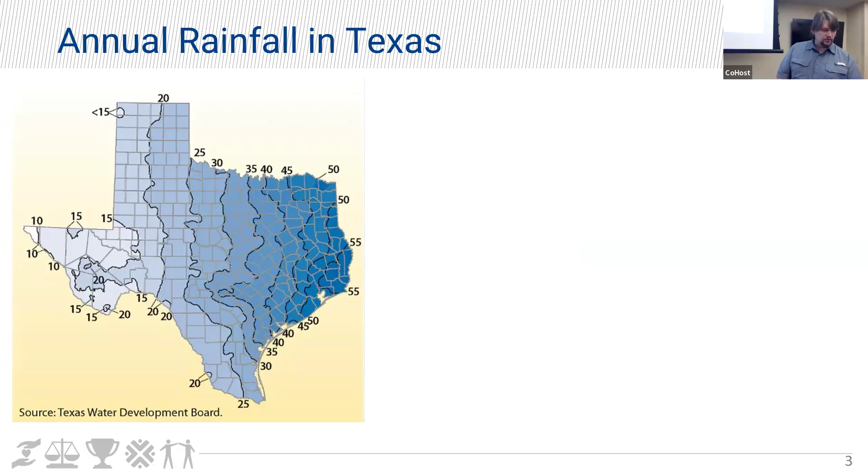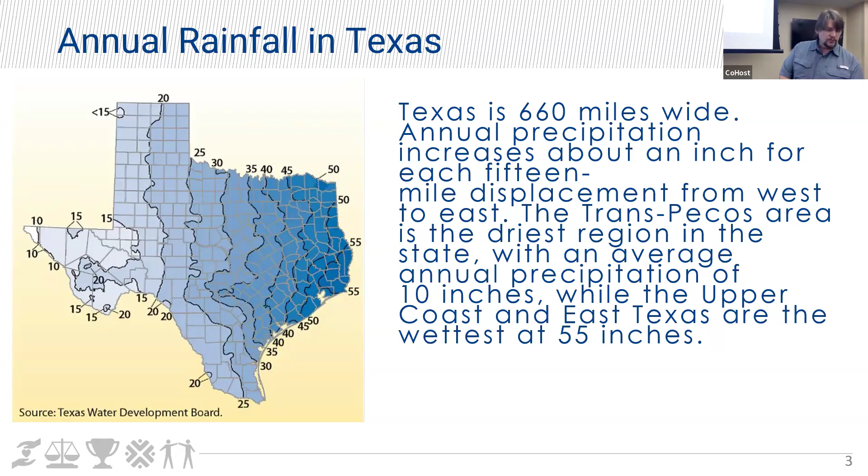Before we get into that, I want to get into the annual rainfall in Texas. Here's a map. If you see way out in West Texas, El Paso area, they only get about 10 inches of rain every year. And as you move east towards the Beaumont and the Piney Woods area, for every 15 miles, you gain an inch of water. That is important because the area that we live in is very densely populated. And we have to pump water back uphill, back west from the east where it's more abundant to where it's more populated.

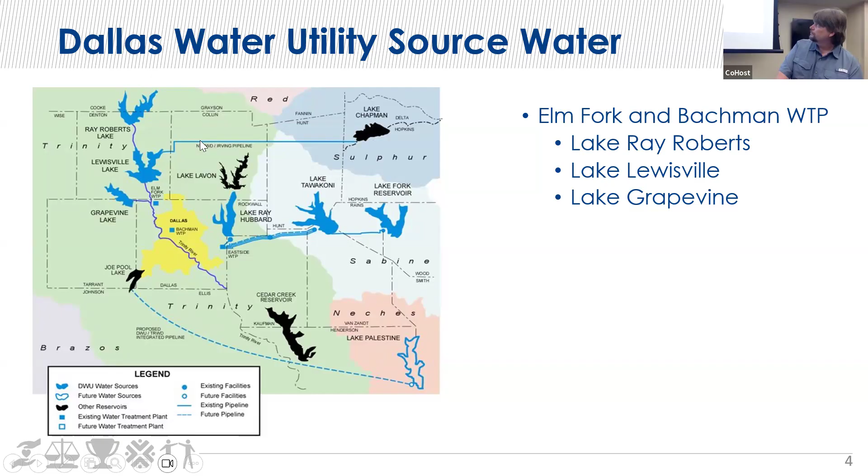However, because we have pipelines from Lake Chapman that pump all the way over to Lake Lewisville, in a roundabout way, we can get some of that water, or that water affects us. The same with Lake Lavon right here. We don't have water rights to that, but it will flow downhill into Lake Ray Hubbard. But this branch of the Trinity River will affect the Elm Fork plant and the Bachman Water Treatment Plant. And down here, on this side, where we have the East Side Water Treatment Plant, these three lakes supply that with water.

Okay. And Lake Ray Hubbard is the only lake that Dallas has 100% of water rights to. We're the only ones that can pull water from that lake. You can see here, water is being pumped from Lake Fork to Tawakoni, and from Tawakoni west into the East Side Water Treatment Plant. And down here, just realized you cannot see my mouse.

Down here, we have Lake Palestine. Dallas does have access and water rights to Lake Palestine, but we can't access it yet. They're in the process of building the IPL, the integrated pipeline, that will move water from Lake Palestine back up to Joe Pool. And from there, the next few years, Dallas will be accessing that water. And whether it goes from Joe Pool up to the Bachman Water Treatment Plant, or whether they build a whole other plant, remains to be seen.

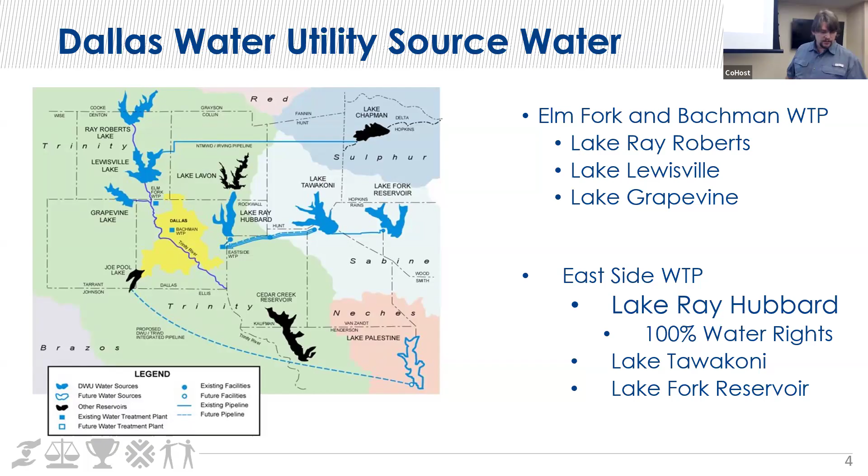Okay, anybody recognize this? Dallas Cowboy Stadium. It has an interior volume of 104 million cubic feet and can hold approximately 778 million gallons of water if it was totally full. So at maximum capacity between the three plants, we produce 900 million gallons a day. And that's enough water to fill Cowboy Stadium up in 20 hours and 45 minutes, or 422 times per year at full throttle. That also equates to 328.5 billion gallons of water in 1 year.

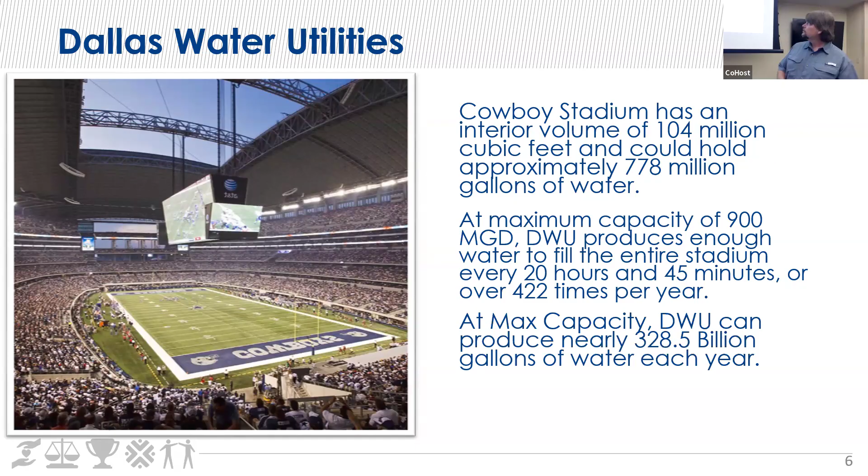So I'm going to go into the plants and break it down a little bit. The Bachman Water Treatment Plant, where I work, is the oldest treatment plant. It was constructed in 1929. It's still in service today. There have been other plants in the past, but they were too small and outdated, and they did away with them. We've had multiple expansions in the 30s, right after it was built, 40s, and 2001. Currently, we can do 150 million gallons per day.

We have had multiple treatment upgrades throughout the years to comply with ever-changing drinking water regulations. So as technologies improve, our regulations get tighter. We have to come up with new processes, whatnot, to treat the water. Currently at Bachman, we have 54 employees at that plant. Now we'll go into that here in just a few minutes.

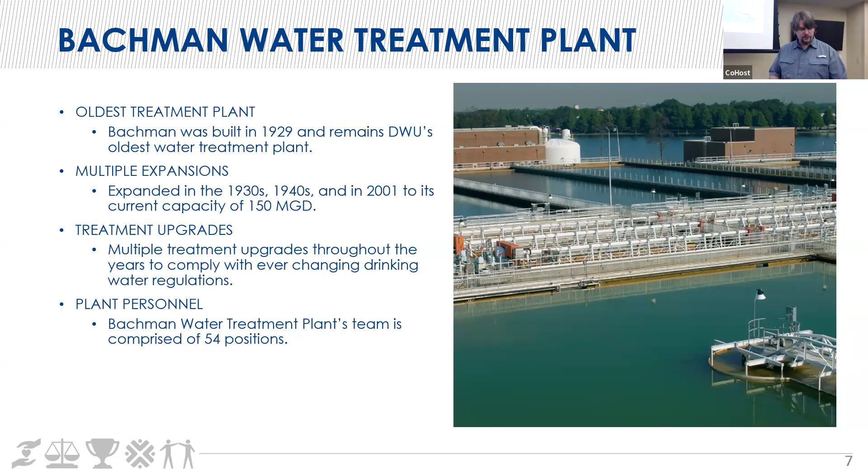Elm Fork. That's the one that's way up north in Carrollton. It's the second oldest treatment plant, and it was built in 1952. So remember that date, 1952. They've had multiple expansions over the years, 60s, 80s, and 90s. They've also kept up with the upgrades, and they have 50 positions at that plant.

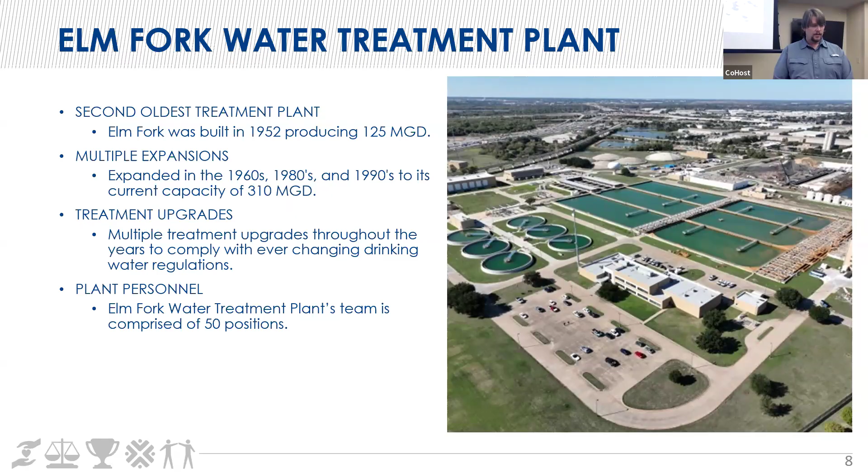10 years later, East Side plant was built, 1962, and that's still our largest water treatment plant. They've had multiple expansions over the years also. They also have maintained treatment upgrades to comply with the new technologies and regulations, and they have 71 positions at that plant.

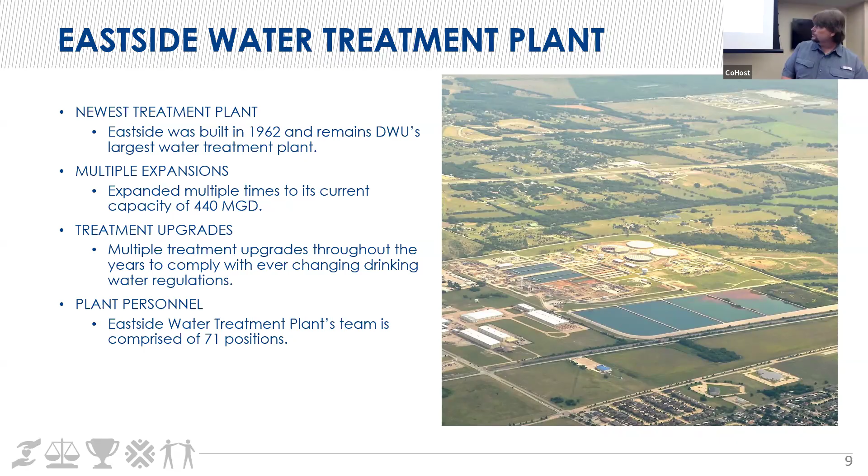Okay, so Bachman being the oldest, right here, built in 1929. We're coming up on our 100th year pretty soon, next few years. It sits on about 30 acres. We can no longer expand that plant and haven't been able to expand that plant for quite some time because the city grew up around us. The same with Elm Fork. The city has pretty much grown up around the Elm Fork plant. They have a little bit of room up there for expansion, but not very much.

So Bachman sits on about 30 acres. East Side, way out in Sunnyvale, sits on about 250 acres. So they have plenty of room to expand. And it's a good idea that they built that plant way out there because whenever Dallas does expand or can expand, it can only move out eastward, which is helpful because we already have a plant out there that can handle that much growth. Okay, let's see.

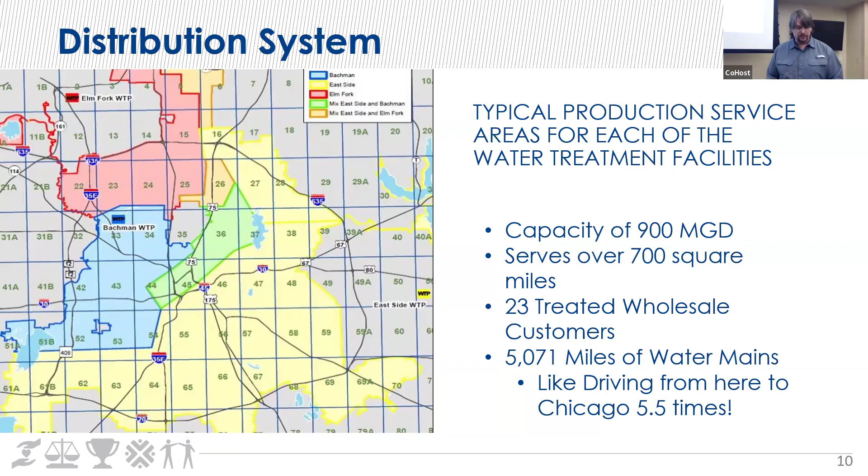This distribution system area serves over 700 square miles. We not only supply water to Dallas, but also 23 customer cities and large customers. There's almost 5,100 miles of water mains in this city. And that's like driving from Dallas to Chicago 5.5 times. That's quite a bit. And that's just the water mains. That's not sewer mains. That's just water. Let's get into the distribution system that we're talking about.

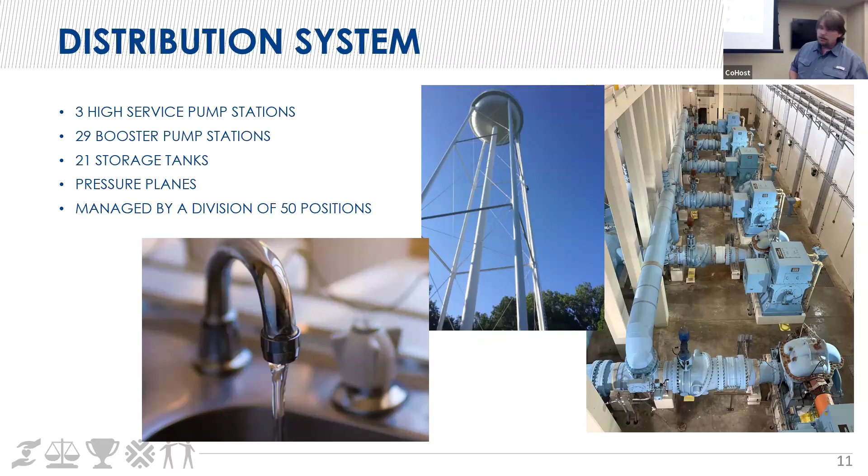So pressure planes. Basically, a pressure plane is based on elevation throughout the city. About every 130 feet of elevation starts another pressure plane. And right about, let's see, we'll talk about right here. Whenever the water comes into the system at its lowest point, there will be a booster pump station that will pump it uphill into a ground storage reservoir or an elevated water tank at the highest point of the pressure plane. That maintains pressure in the system in that little geographical area and a good supply.

So at the top of the hill, your pressure is going to be lower because the water is only going to be about however many feet that tank will hold. As you get down to the lowest part of the pressure plane, the water pressure will be higher. You may also have to have at certain points pressure reducing valves so that you don't have too high of a pressure, which may cause pipe breaks, things of that nature. It's based on efficiency, longevity.

So try to imagine the city of Dallas as bowl shaped, with downtown being at the bottom of the bowl. So whenever you take water from the bottom of the bowl and pump it uphill, about every 130 feet that you gain begins a new pressure plane. And you will not only have storage tanks, but outside of the storage tank, you will have isolation valves that will separate the water from the next pressure plane from running back downhill and increasing the pressure. That way we maintain about 40 to 100 PSI in each pressure plane.

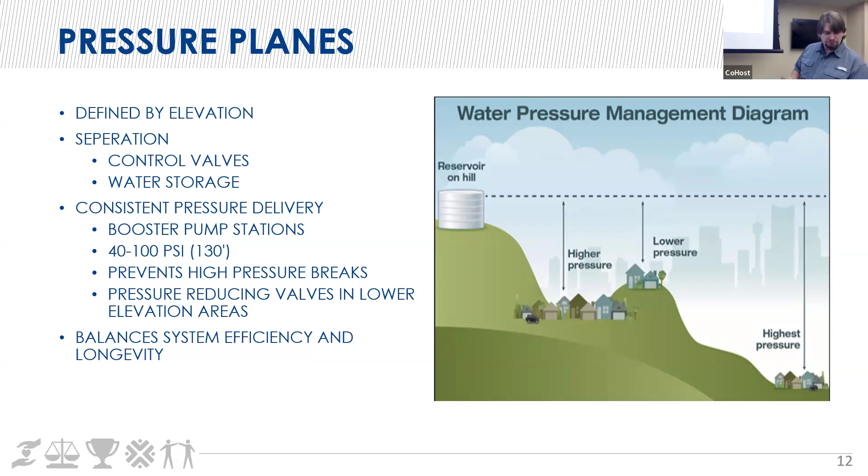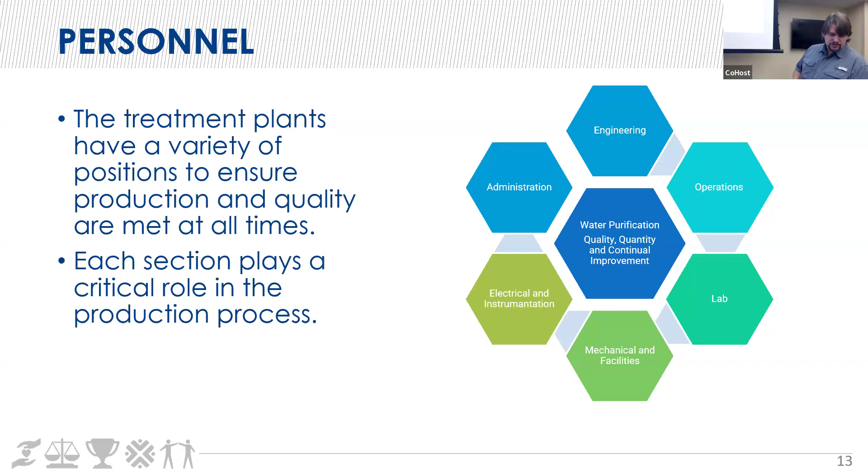Okay. So at the water treatment plants, we have a variety of positions that help make water treatment happen. We have operators, lab personnel, mechanics, electricians, administrators, that sort of thing. Under the operations umbrella, we have operators. Their job is to monitor water quality, conducting tests, operating all the chemical systems, utilizing the SCADA system, which is computers which allow us to control all of the various processes from a central location.

Our operators are also hazmat certified, so they can go in confined spaces. They also do process control, which is applying the chemicals, ensuring that the chemicals that they're applying are done in a way that is efficient. They're not wasting a bunch, wasting money, overfeeding, that sort of thing. And there's no experience necessary to become an operator. As long as you have your GED or high school diploma, you come in, and all the training we do is in-house. We will teach you water quality, and you can go to TCEQ online and take a test and get certified. And there are many different levels for that.

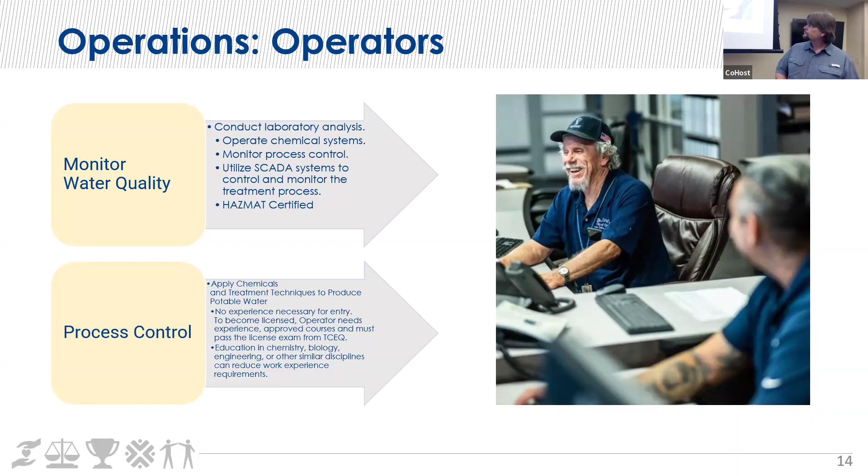Also under the operations umbrella, we have our laboratory chemists, and they also do process control and monitor water quality. And they work as a system of checks and balances with the operators. They perform some of the same tests, and they inform the operators if there's a discrepancy or there's an issue with the water that they need to make changes with. They work during the day. At night, it's just the operations staff at the plant, so they will perform the big tests themselves.

Not only do the chemists perform the same water quality tests that the operators perform, but they also take care of things like testing for manganese and dissolved oxygen, TOCs. They even go out to the lake where we have our pre-sedimentation lake at Bachman and check for zebra mussels and that sort of thing.

So one of the other umbrellas that we have at the plant is the maintenance department. So anything that is mechanical in nature, pumps, feed equipment, that sort of thing, the mechanics take care of. And they are also hazmat certified to go in confined spaces and whatnot.

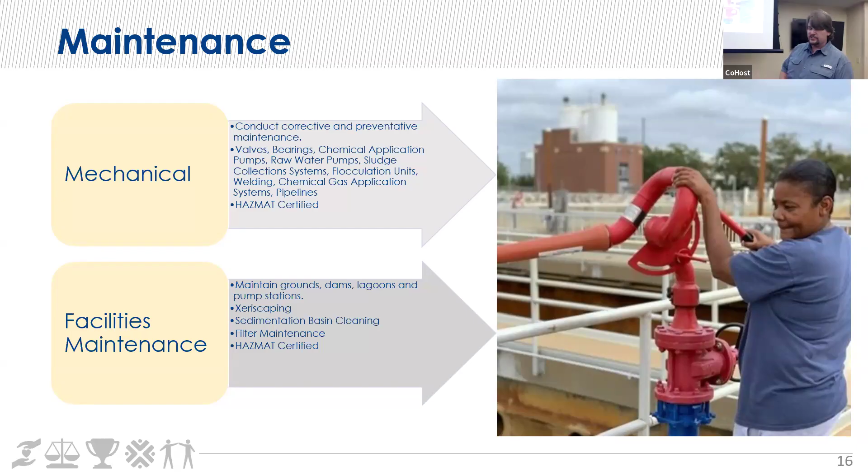Also under the maintenance umbrella, we have electricians. We have journeyman electricians, we have master electricians. And as soon as power is brought to the plant, it is the electricians that we have that move it to wherever we need it. All the buildings, all the pumps, feed equipment, everything. They maintain all of that.

We also have an instrumentation team, tech team, and SCADA programmers. Their job is to monitor online meters, calibrate them, make sure all of our feed equipment is flow pacing or performing as it should. And the SCADA programmer, he brings all of the processes into a central location for their operators to run the plant. SCADA stands for supervisory control and data acquisition.

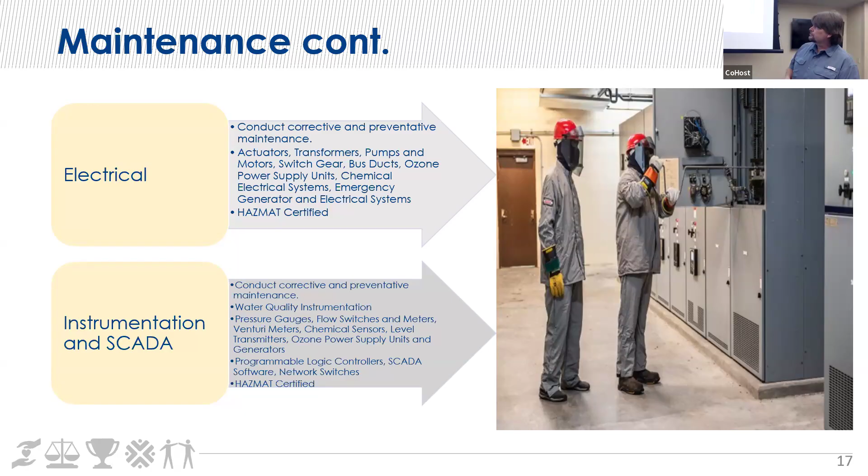So there's two parts. Yes, there's supervisory control so that operators can operate their plant equipment from one location or locally. But it also serves as data acquisition. So it's like a historian feature. So any kind of feed equipment, filters, you name it at the plant, we can pull trends and build spreadsheets and whatnot off of that. And both of these teams are also hazmat certified.

Another branch that we have at the plants is our engineers. And their job is to develop projects, improve processes at the plant, do research, conduct tests, or gather samples and send them off to a certified lab for testing, improving efficiency, keeping up with changes in technology. They also work as a liaison with contractors and vendors and outside labs, inspectors. They are very busy and very important.

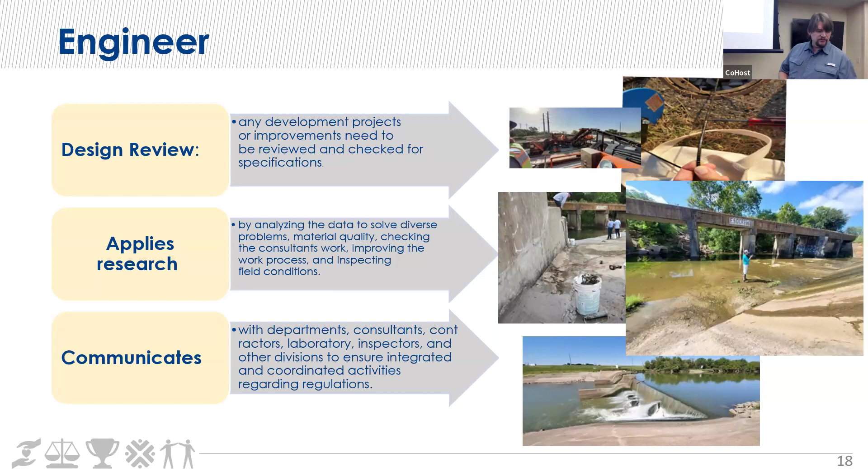Another position that we have at the plant is our environmental coordinators. And their job is to not only conduct safety and training and make sure that everything we do is safe, but also taking care of any first aid equipment, inspecting things like fire hydrants, eye washes, AED defibrillators, first aid kit components throughout the plant, our SCBAs. Those are the air tanks and the masks that we need when we go in certain confined spaces when we're doing maintenance in those areas.

She takes care of all that, keeps up with all the forms, makes sure that we are in compliance with the areas we need to be in. She is also our environmental coordinator, and she takes care of making sure that everything we do is environmentally safe. We're not having any chemical spills or anything that would impact the environment. They're very knowledgeable of the federal and state regulations and constantly doing training on not only safety, but also environmental things.

Okay, now we're going to get into the water treatment train aspect. So what happens to the water when we get it at the plant? So we get our water from the area lakes and rivers. All three plants in Dallas are surface water treatment plants. That means it's lakes and rivers and not groundwater. So when water first comes to the plant, we call that raw water because it hasn't been touched yet.

The first thing that happens is it goes into ozone contactors for disinfection. And if you can see right here, as water comes into the contactor, it has to go up and down these baffles. And that's where we inject our ozone. And we have to create ozone at the plant using liquid oxygen, which will turn into gas oxygen, and run it through a generator, which will zap it with electricity and create ozone. Ozone is very efficient at killing bacteria and little microbes in the water, but it doesn't last very long.

So when we inject it here in these first two cells, and we can inject it all across, but these first two cells actually show it. When we inject it into the water, it goes through diffuser stones, which create tiny bubbles. And as the water is coming down the baffles, it's running into all these bubbles to where it's agitated and has the most contact with the ozone. But by the time the water makes it across the contactor, there's very little, if any, ozone residual left.

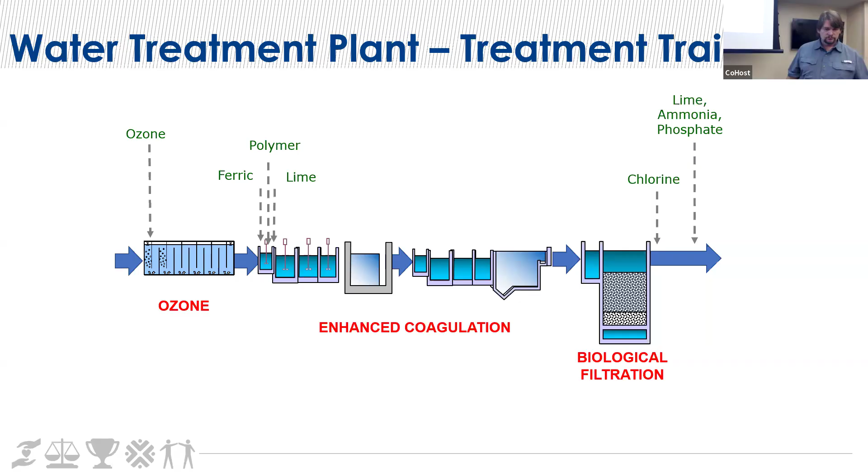Chlorine by itself is very strong, but just like ozone, it doesn't last as long. But if we add ammonia to the chlorine, it creates a chloramine, and it has a lot longer lasting power. I'm going to get into some compliance.

Okay. DWU adheres to ISO, which is a non-governmental international organization. And basically, it's like a universal system across several countries. That way, the language is the same, the numbers are the same, quality is the same. It's a framework kind of thing.

Not only do we adhere to water quality, we also adhere to environmental regulations, and we're actually certified environmental. And we also adhere to ISO health and safety. That improves safety, efficiency, environmental performance, things like that on a global scale.

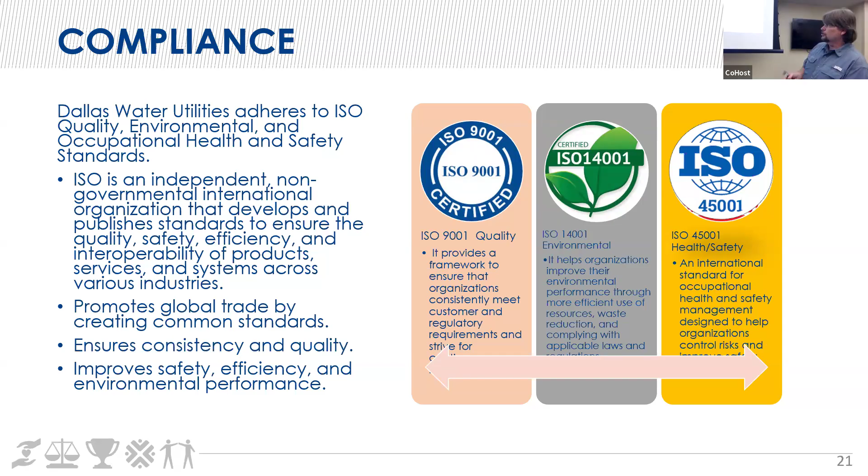Okay. Another part of compliance that we do is drinking water rules and regulations. So part of that is the EPA, which is the national level. They hand down certain standards and regulations through the Safe Drinking Water Act and the Clean Water Act and things that affect the water on a national level. But from there, it goes to the states. And TCEQ uses that and creates their own rules and regs and makes it a little bit more stringent.

Part of TCEQ is the Texas Optimization Program, which is a voluntary program. And it's just a very tight window of standards that we adhere to as far as the finished water coming off of our filters, maintaining a very clean level of water, basically.

Another aspect that we follow and comply with and participate in is the AWWA Partnership for Safe Water. They do a lot of the same thing that the TOPS program does, but they also look at things like disinfection, not only as it leaves the plant, but in the distribution system. And that just helps ensure that there is a certain level of quality in the finished water that comes to your house.